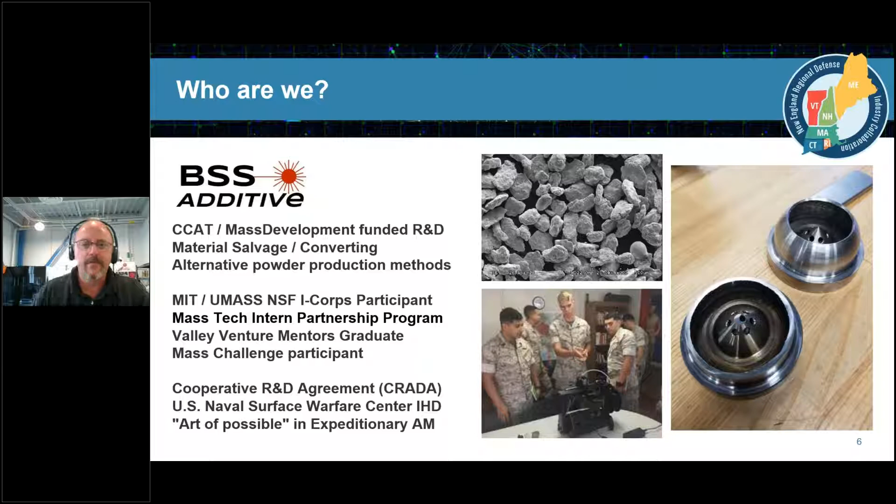Towards that, I've got a number of colleagues. The first, who I'll introduce, is Jean Mozolic from the Mozolic Group. Jean, go ahead.

Good afternoon, thank you Steve. My name is Jean Mozolic, and I do have my own consulting company, the Mozolic Group. A little about my background: I have a bachelor's and a master's in material science from MIT. I've spent the last 45 years in the thermal spray industry with a real interest and expertise in materials, predominantly metal and ceramic powders, giving me broad industry-based experience utilizing these technologies.

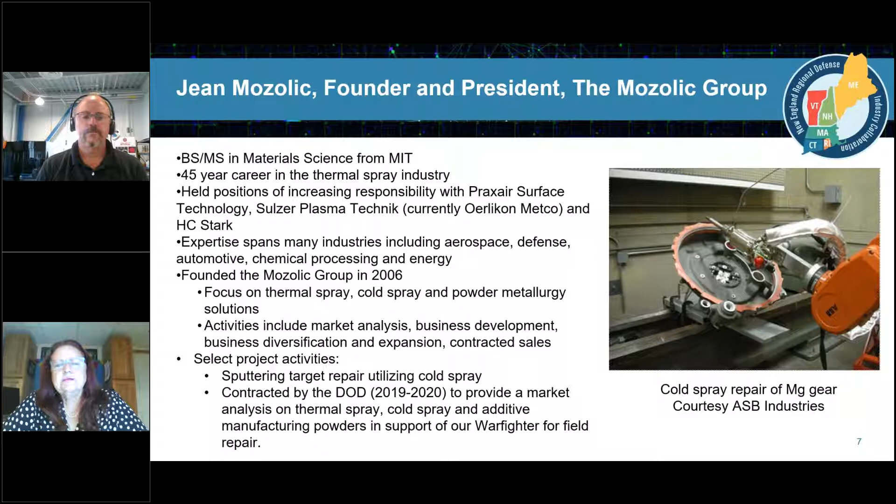Now, I'm part of Steve's team, supporting that through my background and interest in powder metallurgy. Also very much interested in the recycling and reuse of materials, which is becoming extremely important to the DoD because there's a real need to support the war fighter in the field. They don't necessarily have materials off the shelf, so there's all kinds of technologies out there to look at converting scrap metals and components into usable materials to feed the various processes.

My particular background in recycling goes back to my thermal spray days. One area was managing hexavalent chrome, a very well-known carcinogen from chrome oxide powder used in the printing industry. Also the reuse of tungsten and cobalt units from hard metal scrap, predominantly drills, bits, and seals.

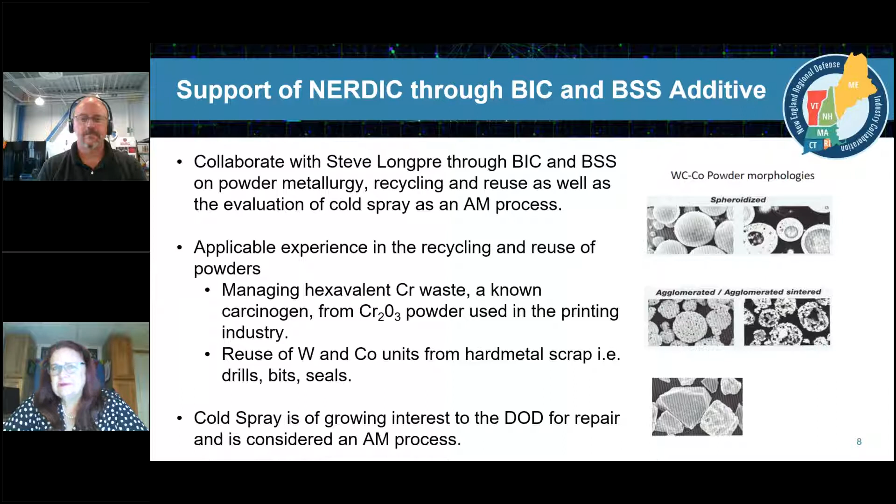I'm a 25-year veteran in the technology industry, starting out as a design engineer in pro audio, then onto consumer products and enterprise products. It was about 17 years ago now, I think, that I bought my first 3D printer as a design engineer. We found it invaluable in getting engineering verification and industrial design verification of the products.

We were in the early stages of development and very quickly moved on to upgrading those from a product marketing standpoint, because we found sales samples and getting into business and market development by getting works-like samples out into the hands of potential customers while we were still early in the design phase was incredibly valuable.

As I eventually became responsible for watching P&L statements, I became very interested in what additive manufacturing might do for us in terms of inventory control in the future, and how manufacturing final products with additive manufacturing could revolutionize the market. That's kind of where I've been pushing in my interest in this field for the past several years, and that was kind of the context of how Steve and I met 2 or so years ago now in the context of BSS Additive.

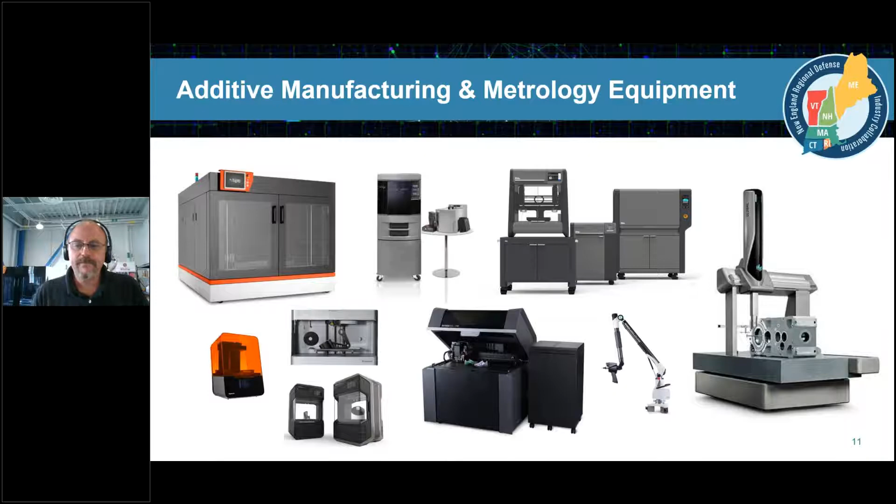We were recently, because of the work we started in this space - the virtual reality, mixed reality, simulation, and 3D scanning space - awarded a significant grant from General Dynamics Mission Systems, an award of 15 HoloLens One headsets that we are now helping our members access. We hope to be able to offer these to NERDIC partners for development purposes, things like training on advanced manufacturing, but also legacy systems, ways that we can start to hand that information on how to utilize these manufacturing tools to benefit the defense supply chain and ultimately the warfighter.

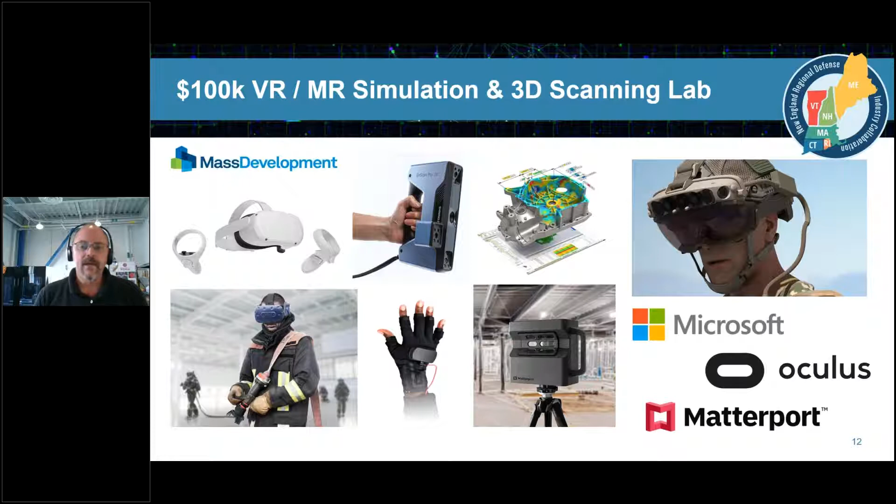On this particular project, the benchmarking project, we also extended an invitation to the University of Massachusetts ADDFab facility, which is just over about an hour away in Amherst, Massachusetts. In addition, we've been working closely with our NERDIC partners, CCAT and UMaine, to produce the samples that we'll be discussing shortly.

So I get asked a few times, why benchmarking? What's important about benchmarking? This is a 3D printing discussion, why would you need to have a benchmark? Well, benchmarking is for anybody that's in manufacturing - it's an essential process to understand the performance of a particular system, whether it's an economic system or a production system, machining, injection molding, roll-to-roll process. You can't get very far unless you've actually developed a methodology, and that methodology stands up to iterative examination.

And especially today, where we sit in front of computers, we sit in front of cell phones, we sit in front of machines that collect data that are capable of processing more data than any of us can possibly handle in a lifetime, it seems. Being able to gauge those systems, understand how those systems work, and how the data collected from them can be used to improve their performance is a key component of Industry 4.0.

And so we decided that taking a look at benchmarking the equipment that we just purchased is a core feature, because the last time somebody benchmarked additive manufacturing through one of the national organizations was back in 2014, at least in the particular area that we're looking at. So we decided that this was a good first effort.

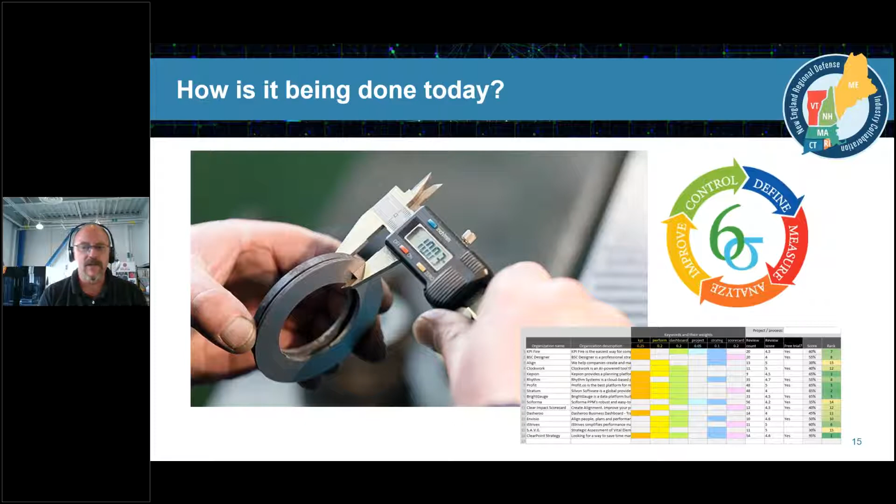We've also seen the advancement of a whole range of technologies, from large CMM systems to handheld portable systems like handheld scanners, Romer arms, and some of the technologies they have down at CCAT, like the ATOS ScanBox. These are automated metrology systems, ways for measuring and collecting data, and they're becoming more and more a key component of the commercial manufacturing ecosphere.

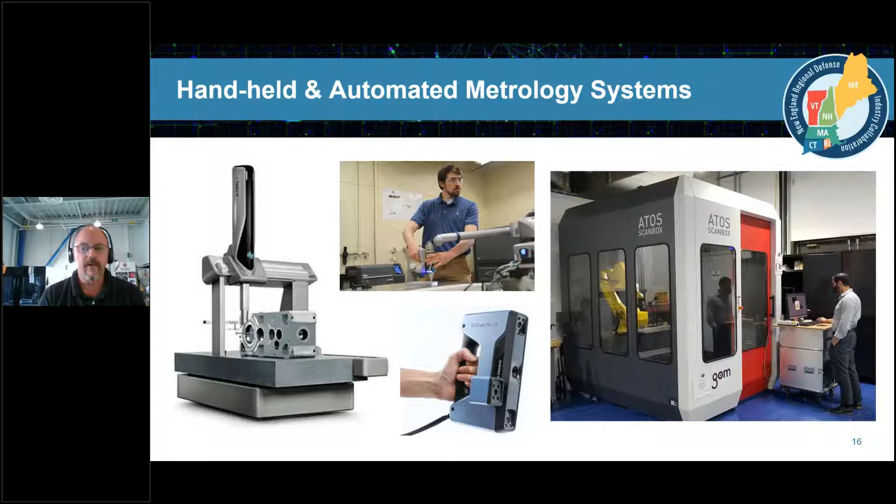But we're seeing a new trend occur in advanced manufacturing, and that's on-machine measurement and inspection. Because of the Internet of Things, because of our ability to create cheap sensors or complex sensors, things that can do things because of laser light scanning, measurement, non-contact measurement and temperature probing, we can start to collect massive amounts of data from the things that we're manufacturing, and we have to find new ways to display that.

So we've seen the rise of companies like MachineMetrics here in Massachusetts, who are developing digital dashboards, ways for manufacturers to install methods or systems for the people on the shop floor to actually start to gauge how their equipment's behaving, how their production cycles are scaling, and nimbly react to that data.

This is becoming a center point of what 4.0 technologies offer in the future - the ability for us to now start to mount and incorporate Internet of Things types of devices, edge detection devices within our equipment, and not only in manufacturing, but in things like facilities operations, delivery, and so forth. So that's a key component in benchmarking.

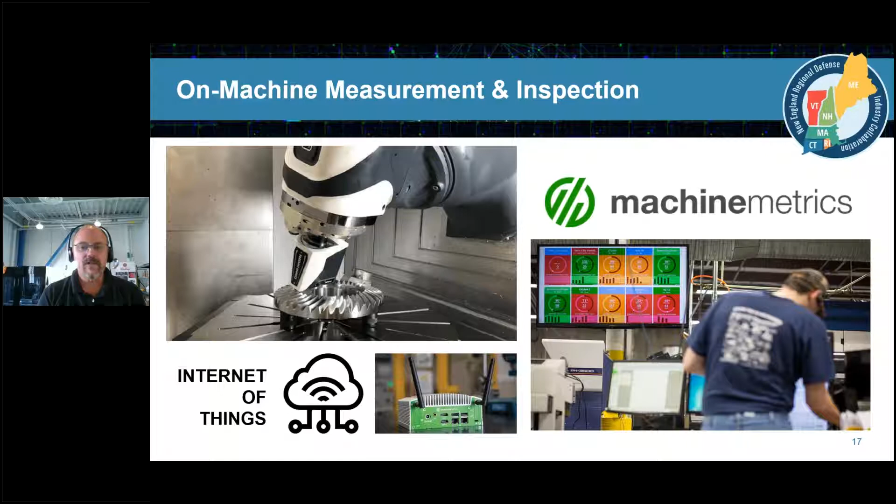So what we did is, to start our quest to understand how to benchmark the desktop metal system, we looked at what was done in the past through the National Institute of Standards and Technology and ASTM under F42. We looked at the technical standard they used for measuring the performance of laser powder bed fusion systems, built upon information from machine metrology and benchmarking subtractive machining, using simple repeatable patterns like circles, squares, diamond shapes, stepping, graded steps, pinholes or pins. Understanding how these features could be manufactured using these systems was a key question back in 2014.

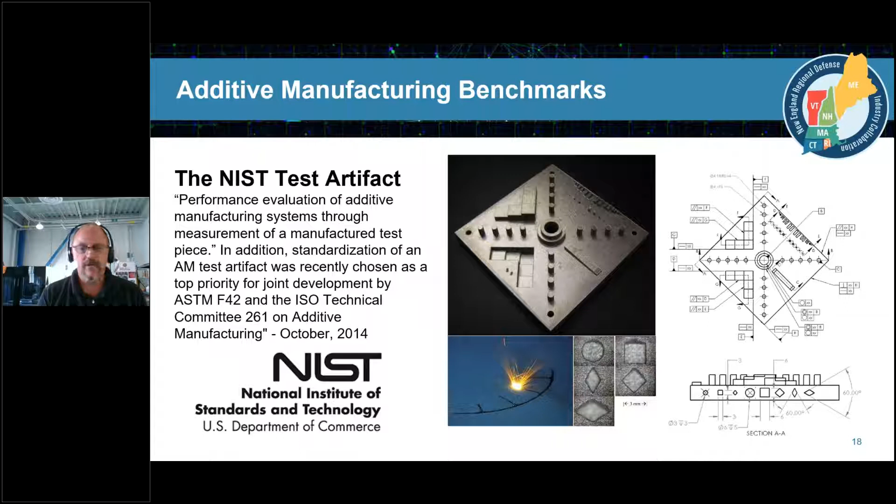We wanted to ask the same questions around the desktop metal machine because it was recently iterated. It's only been around for about 2 to 3 years now, so this was the starting point for our examination.

We also wanted to understand how we would share that information. While NIST data is being constantly collected and integrated into databases like the Senvol database, we'd like to understand what the challenges are for benchmarking these new FDM or bound metal type processes, metal injection mold, powder binder jet fusion type processes. Will those also be incorporated within Senvol databases? So we had to understand how the data set might actually be of value and what its size might be.

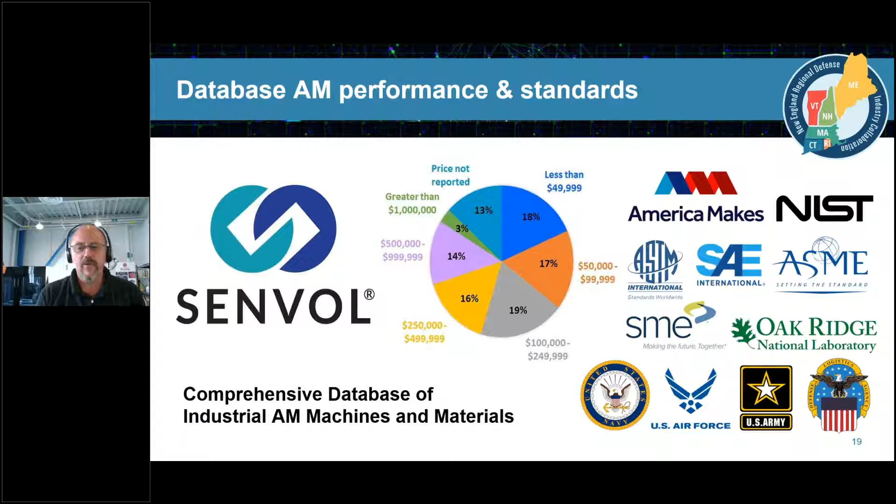So we started again back in the learning area. How are hobbyists learning to benchmark? It's interesting - most people that have played around in the 3D printing space have printed at one time or another something like this, called a benchy.

There are other types of benchmarks, torture tests as they're called, that can demonstrate things like dimensional accuracy, the ability to bridge or create overhangs, fine feature controls. These are all things people are doing constantly with their 3D printers, and in the process learning how to actually operate them. If you look at the scientific community, they're actually starting to print very, very tiny benchmarks, like this 20 micron size benchy that was printed, I believe, at one of the national labs.

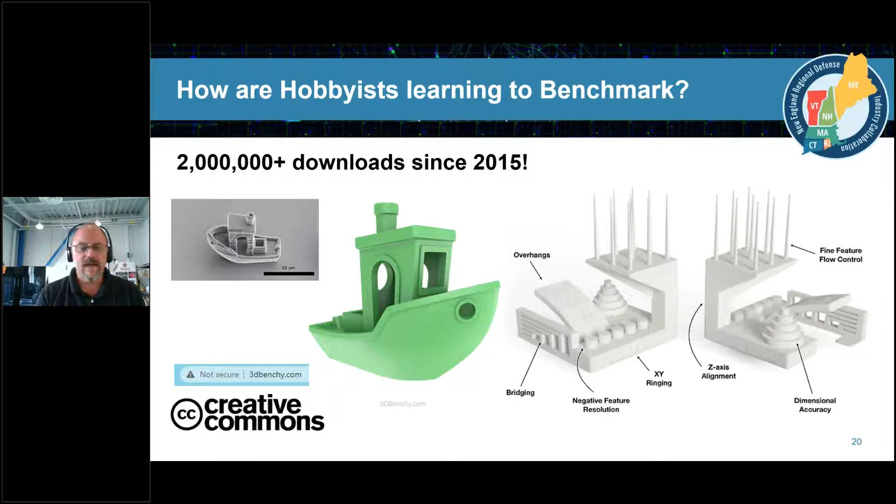The interesting thing about this is these benchmarks are seeing enormous distribution, over 2 million downloads since 2015. That's significant because the people that own hobby level 3D printing systems are becoming kind of a standards group - they're becoming a manufacturing capability unto themselves. The challenges with that, however, come into things like Creative Commons, and the benchy site itself is not secure. I found that kind of humorous, because when we're looking at national defense machining standards, those things have to be addressed, and unsecured benchmark or information sites, Creative Commons - that's not within the realm of defense machining.

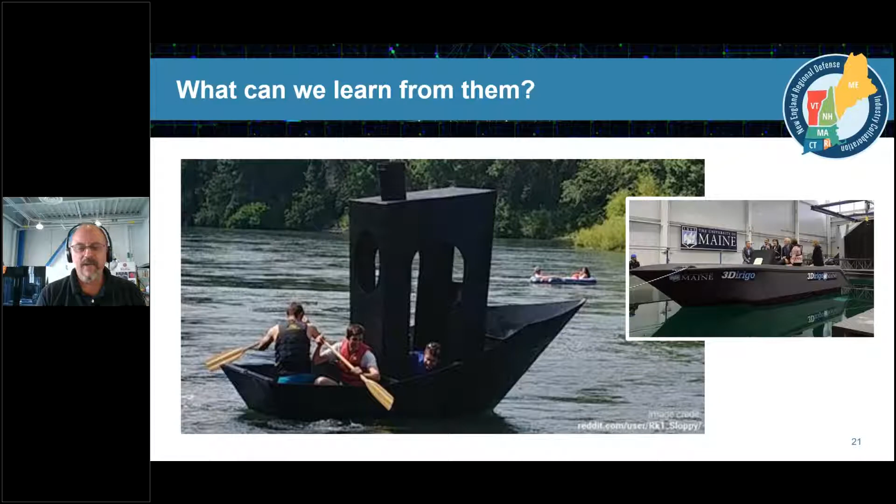So again, what can we learn from the hobbyists? Obviously we can print very large structures. We might even be able to get them to float. And in some instances, like University of Maine has demonstrated, they can be done at very, very high quality. So these are two extremes, obviously. We want to fall somewhere a little bit towards the right side of that equation. Understand that defense machining is not just something you're going to float down the river in, but hopefully we can help manufacturers iterate towards the right side of that equation.

So again, back to the desktop metal system - we wanted to understand what its capabilities were, what its material and operating requirements were, the software, what kind of case studies there were, and how these benchmarks might apply. We're also, because we're developing reground materials, looking at expeditionary applications. Could this system be deployed in remote locations, whether in a field deployed location where we might be repairing military equipment, or potentially higher range applications, things like NASA, where we're looking at eventually being able to establish permanent presences on the moon and Mars. What is the definition of an office, as Desktop Metal suggests, and how can we gauge what those capabilities are? That was important in our examination.

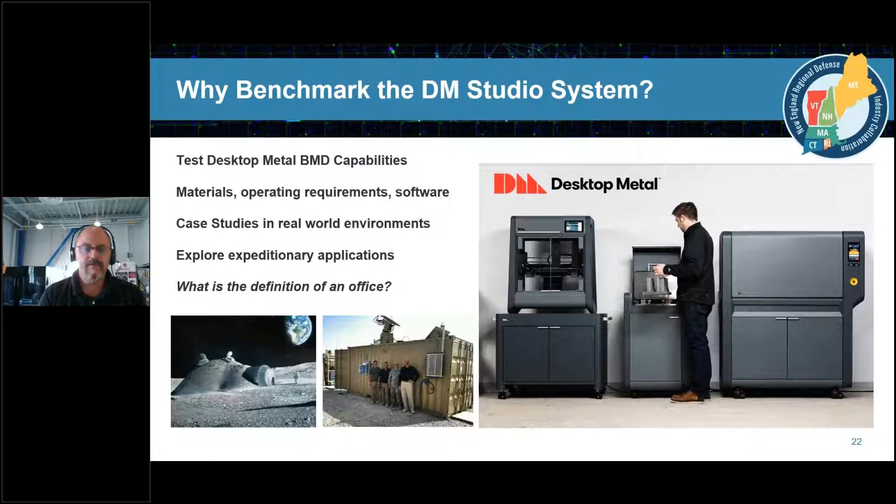So we purchased a used machine, which is something that's common for most manufacturers. There's a lot of equipment out there that's constantly being resold. During this study, a company with very high potential called Digital Alloys, out of Burlington, Mass, ended up shuttering its doors after about 4 years, and their equipment went up for sale on a well-known auction site. So purchasing used equipment is nothing new to manufacturers, especially in defense supply. That's what we started off with.

We purchased a used Desktop Metal machine under a Massachusetts Skills Capital Grant to start teaching and learning about its capabilities. We wanted to understand, first off, how to prepare a facility. What were the requirements?

You can see behind me, we've got a very large facility here. Where would a system like this fit in? That's a kind of benchmark. What would the ventilation, electrical, floor requirements, process gas and feedstock handling requirements be? These are all things small and mid-sized manufacturers need to ask, especially when adopting a new technology. Comparatively, how can it integrate into their current operations? That's another form of benchmark.

Permits and certifications - we realized the desktop metal system doesn't really require any. By comparison, things like laser powder bed fusion systems require much more. So there was an immediate advantage in looking at bound metal deposition systems compared to powder bed fusion and binder jetting, in that we didn't have to handle some of the potentially reactive powdered metals I've had experience with in material development. We also didn't have to worry about enormous equipment being moved in with all the support technologies around it.

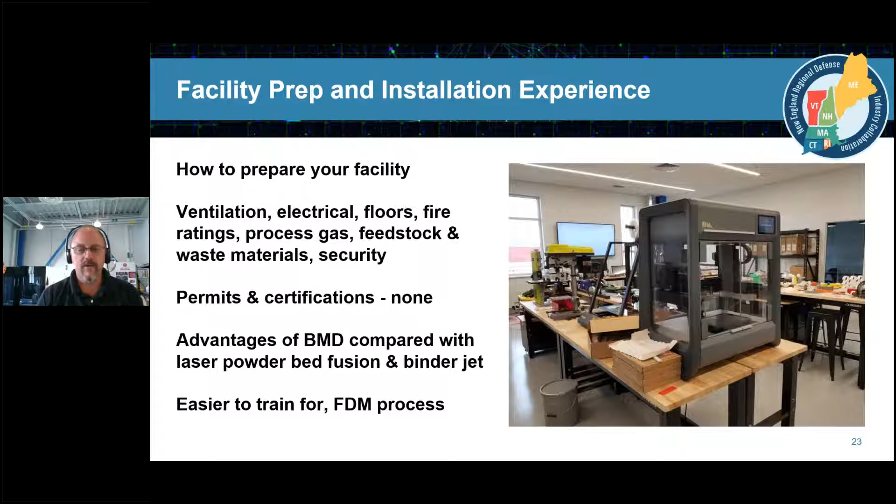So that's another benchmark - how do we train around that? What are the current methodologies that seem to work best, and how can we intersect them to help our members and the local community access and test out metal 3D printing, with the intent of eventually scaling into that space?

What were some of the applications we were looking at? We're a member-driven organization, so some affiliated companies do things like injection molding and thermoforming or overmolding of wire harness cable connectors. We wanted to understand whether this technology could improve upon that process - for example, conformally cooled injection molds, or heat exchangers and chiller designs for mold cooling.

We've got a large group of companies over in New York in the LED lighting industry, an industry that's here to stay because of efficiency and its proven impacts on climate change. So we looked at applications like 3D printed coppers for improved thermal performance elements, as well as things like medical devices. We've got a company here interested in understanding potential tooling applications in personalized medicine.

We also looked at applications in lightweighting of vehicles, with things like bicycle derailleur hangers, potential car parts especially in older vehicles, and also agricultural supply, where all these types of technologies seem to overlap, whether it's fluid dynamics or thermal improvements.

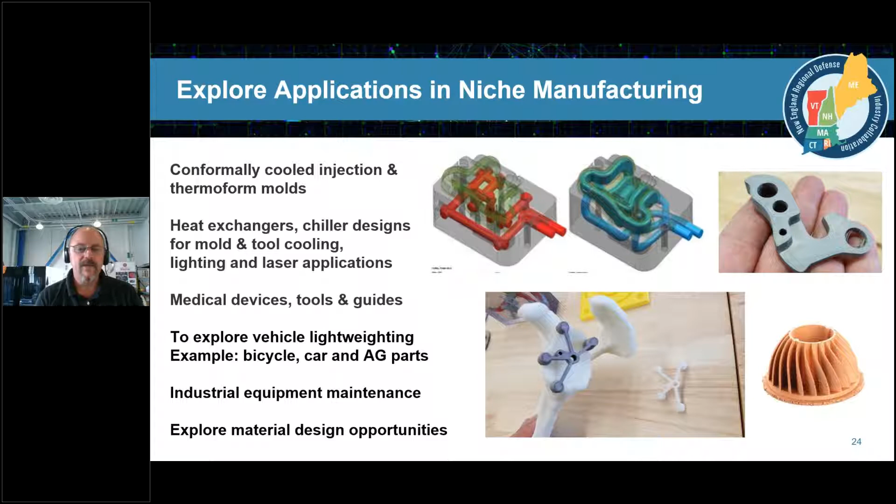So that brings us to the material development side of things. My startup is predominantly focused on materials development. Jean's background is heavily focused on materials development, use, and industrialization, and looking at where this type of material could fit into other businesses, an area that, as Mark touched upon with his background in using 3D printing and industrialization, is a crucial question.

So the BMD system utilizes a stick form of extruded metal, almost like a pencil lead, that gets placed within the system and then is extruded in sequence to make parts. That kind of technology is very well understood. If we make pencil leads or any kind of compressed extruded metal, very low cost equipment can manufacture that.

We wanted to understand whether there was an intersect opportunity for some of the work we're doing in reground metals to potentially use the desktop metal system as a material development platform. What would be the challenges in something like this? What opportunities could bound metal deposition pose for things like quality control? Could it also be used as a stepping stone into things like single pass binder jetting, desktop metal's larger systems, or even binder jetting in general with companies like ExOne? Could we use and measure the performance of these materials as a development platform using the system?

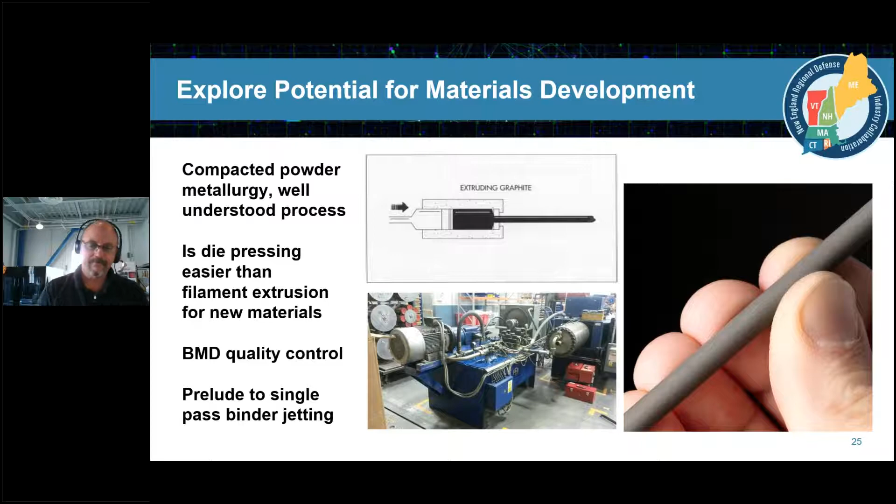This builds upon work we've been doing here before. BSS3D and CCAT back in 2017 discovered that we could indeed recycle stainless steel scraps from turning operations—very simple scrap metals from things like 3-axis CNCs, Swiss milling centers, all sorts of different applications—directly into usable powders.

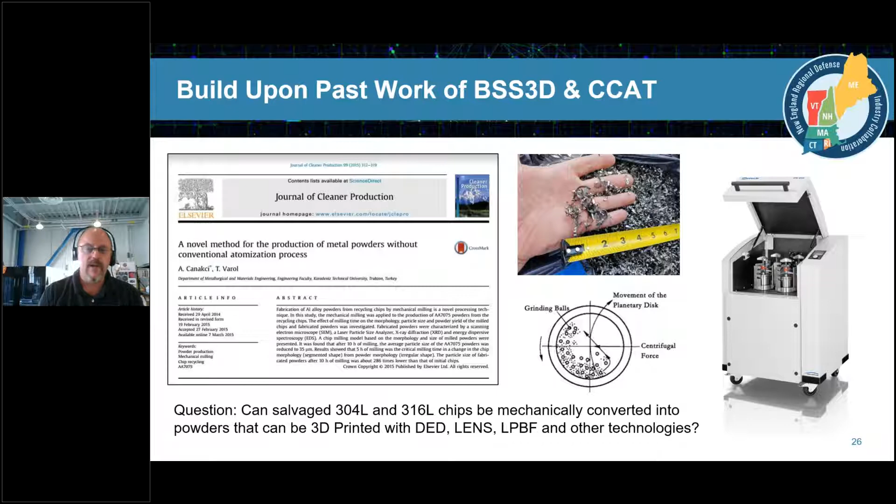This was built upon research we discovered being done overseas in Turkey, where researchers did not have access to gas atomization or plasma atomization to make the highly spherical powders that Jean showed us in her slide. We were looking at ways to convert this stuff directly into powder using mechanical grinding systems.

That indeed ended up with some success. We used directed energy deposition and LENS, two processes that CCAT has, to not only print some samples but also print millable parts using reference designs they've been exploring. That was quite impressive, and certainly worthwhile from the standpoint of short funding science—ways to get things done quickly, demonstrate what's possible, and then start looking at what you need to fill in the blanks.

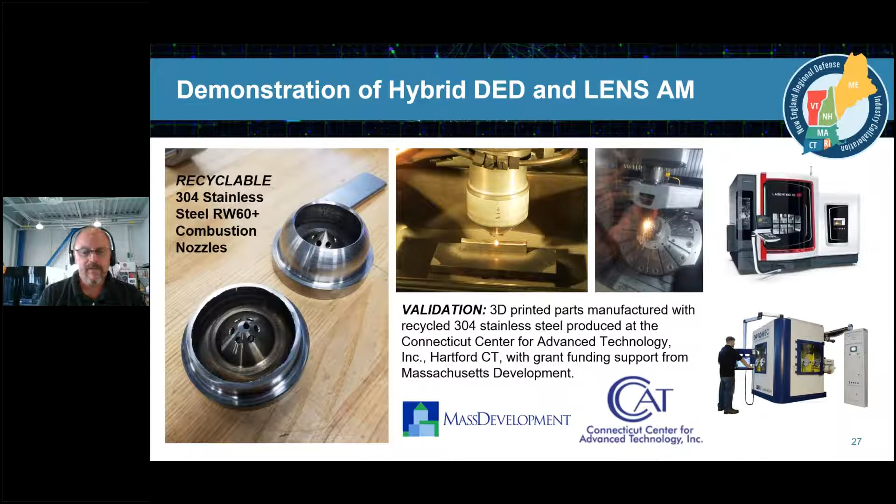So back to those images, our material is on the left. We were able to create a low cost, mechanically milled, rounded grain, spheroidal material with qualities that make it suitable for things like directed energy deposition, potentially FDM or bound metal powder, binder jetting, and also potentially cold spray. By comparison, materials normally produced in the metal injection molding industry—water atomized powders, pressed metal sintering and molding, or gas atomized powders used predominantly in 3D printing—show quite a difference.

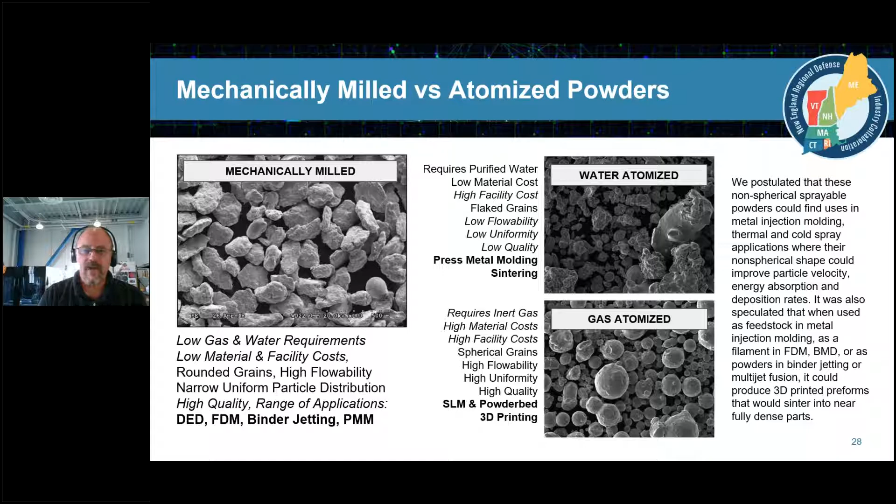But what we found is that our materials have a place in this landscape. The next step for us was: now we can make them, potentially a lot of it—how does it actually fit within the manufacturing sphere?

The next intermediary step was an introduction to the Army Research Lab, where they were doing high-end work producing something called nanogalvanic aluminum—a powder that can react with water or saline-type fluids to produce high hydrogen generation and generate electricity through things like permeable membrane fuel cells. We looked at their technology as an inline production capability for recycling scrap metals in the field.

This technology is fairly well understood. We understand the cost structure around it, and it opens doors not just to remanufacturing scrap metals, but also potentially becoming toll processors for other materials streaming out of our universities—which, in the instance of the Berkshire Innovation Center, the Connecticut Center for Advanced Technology, Vermont Technical College, UMaine, and other participants within the NERDIC framework, represents a lot of really interesting work being done in material science.

How do you get your first sample? Well, we demonstrated that we can do that very simply, but how do you get to production quantities? What are the benchmarks in cost assessment and the economics of those systems? These are things manufacturers need to know, and oftentimes researchers may not have the ability to calculate.

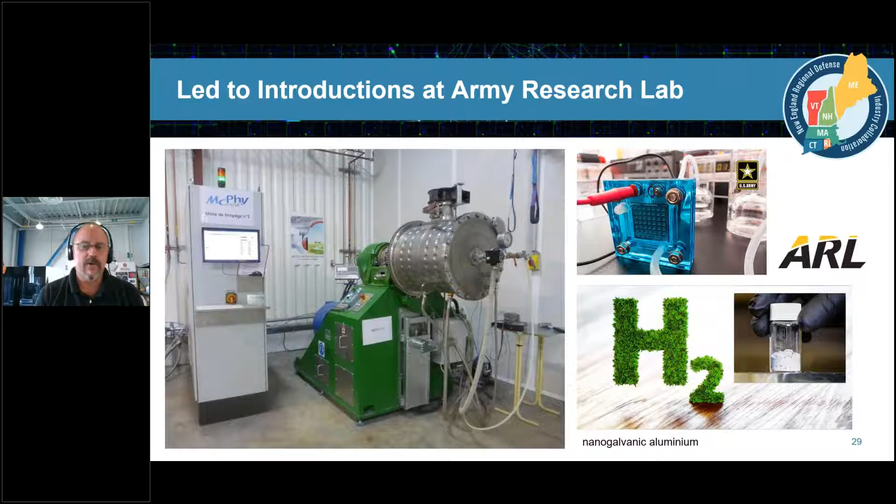So we were looking at that kind of background and research from participants at our national labs. We also looked at scaling supply. How do we go from that point to a scaled production capability?

And again, a recent background is that Desktop Metal has acquired ExOne, a binder jetting company. The integration of those technologies and the overlaps are significant, because in the situation of the BIC, we have some Desktop Metal technology. Connecticut Center for Advanced Technology has some ExOne technology, and we hope at some point in the future to be able to start benchmarking that also.

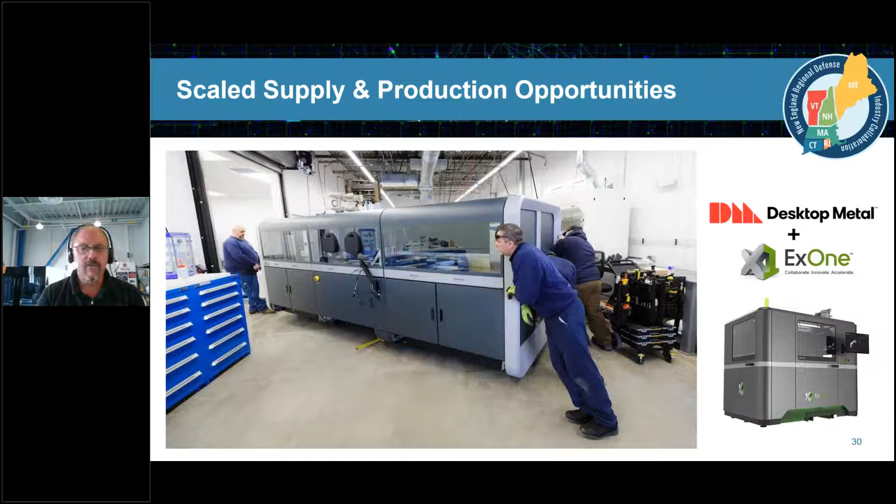And then again, back to some more whys. Lots of reasons why to be doing the things that we're doing. Cold spray expeditionary repair applications. If we're talking about defense supply, there's nothing more important than being able to support those people in the field whose lives are at stake. And so if we're looking at manufacturing something here in the States that's going to be supported overseas, we need to know how to repair it.

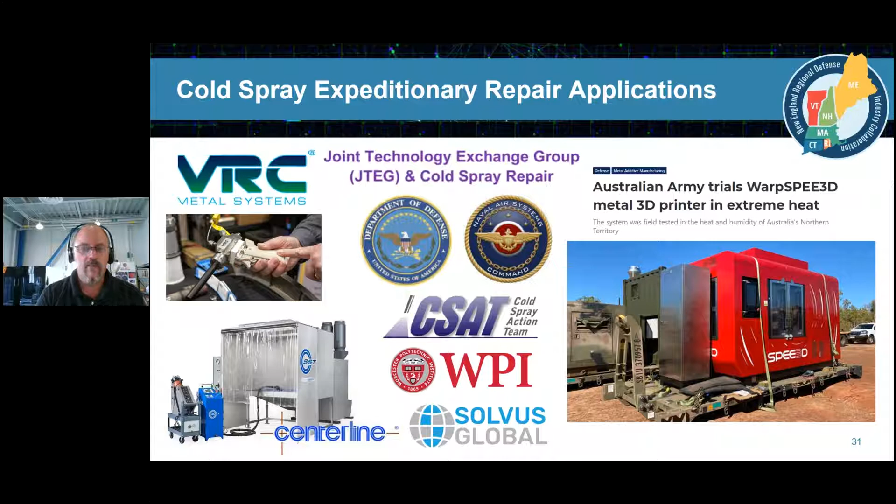Some of the work being done by groups in and around Worcester Polytechnic, Cold Spray Action Team, Solvus Global, and the companies that supply into them, things like Centerline and VRC, and now SPEE3D. These companies are manufacturing technologies that can be deployed in the field, and that can help sustain the products the warfighters actually use. This becomes a core question and a core benchmark that we're looking at examining in the future.

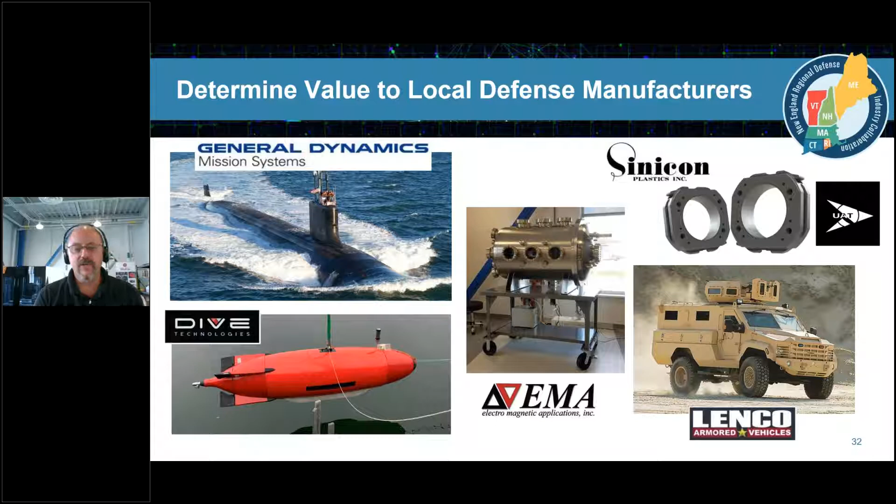And again, why? Because our manufacturers need to understand why. The BIC is host to a number of manufacturers, including General Dynamics, Sinicon Plastics, Lenco Armored Vehicles, a wide variety of manufacturers that need to understand what these technologies can do to make sure their systems have the longest possible life in the field.

And to also explore those applications and what could potentially become threats, things that we might not recognize. I was recently at a CAM event in Lowell, at UMass Lowell, and I asked one of the presenters, who's from the U.S. Army, what they need in terms of additive manufacturing. The first thing they said was, we need ways to manufacture munitions in the field. That is a core need.

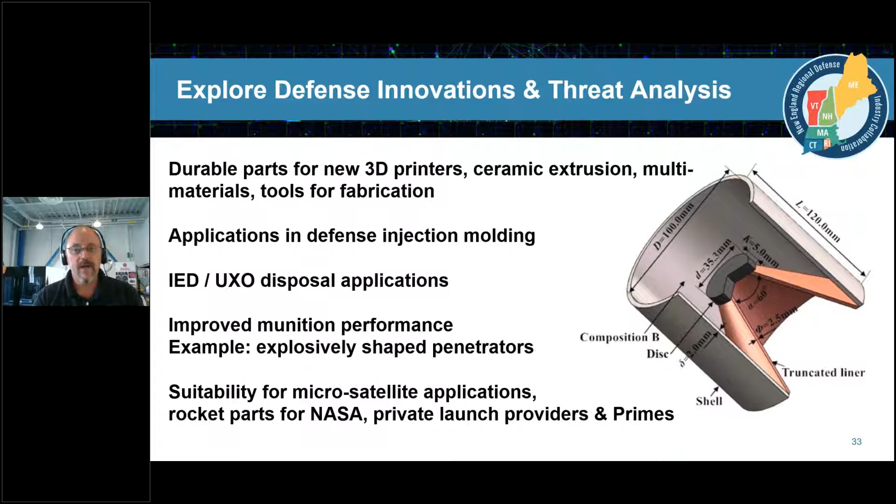And they need also to be able to do that so that they don't have to leave them there. Thinking about what's going on in Afghanistan currently, we've left a lot of ordnance in the field. It would be a lot better if we could just manufacture the things as we need them, which again is another feature of additive manufacturing.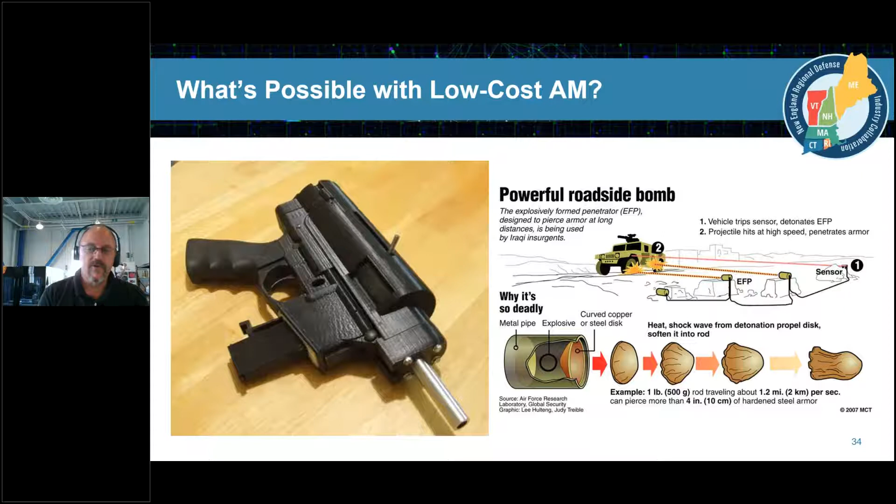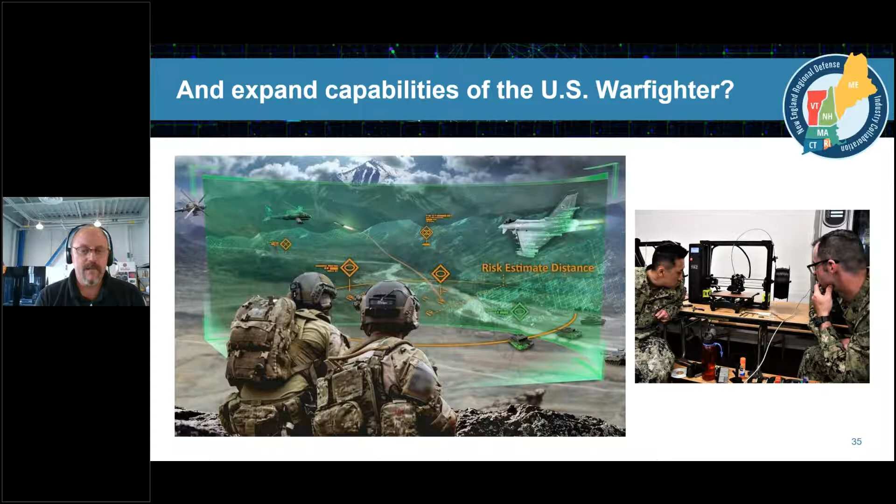And again, what's possible, to understand what's potential, what could be a threat. Benchmarks help us assess that. And ultimately, it can also help us develop new systems that expand the capabilities of our warfighter and help us make sure that they come home safe. So benchmarks are a starting line.

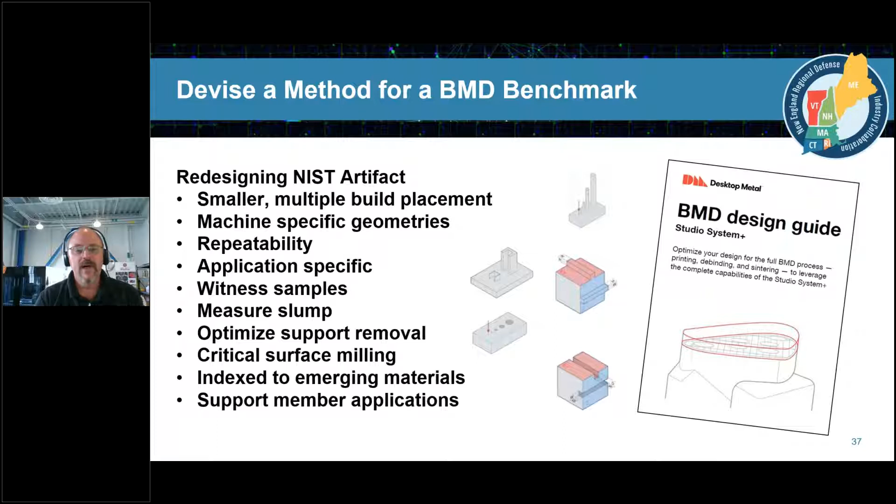And the starting line for us was the NIST benchmark. We used bound metal design guides from Desktop Metal to understand what was possible with the machine and what would be of value in terms of data.

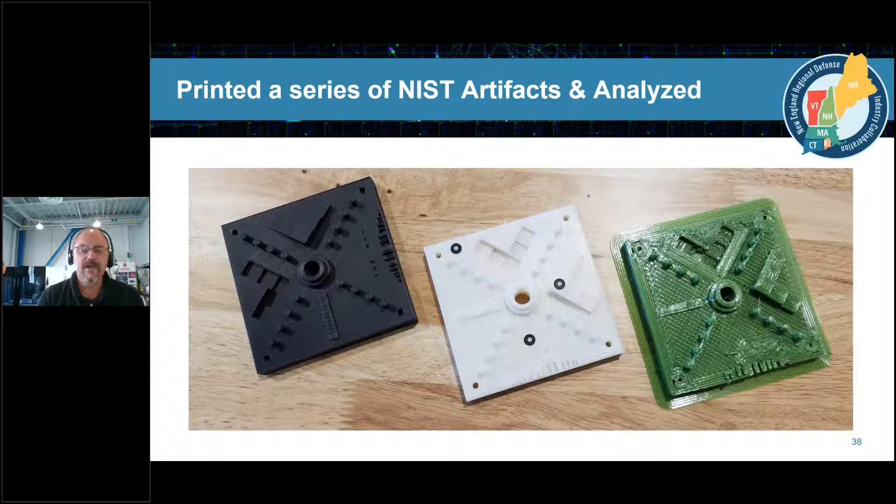We then used some help from a partner down in Rhode Island, Hexagon Metrology. They are the manufacturers of large scale and small scale automated and legacy coordinate measuring machines, CMMs. They also use structured light scanners to help reverse engineer and inspect parts. We got some initial data to understand what was possible from these first NIST benchmarks.

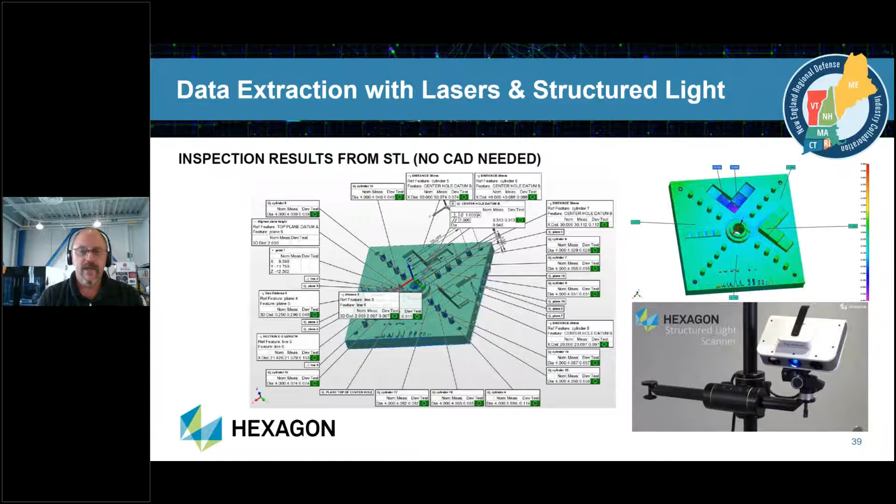We then realized that in the process of trying to 3D print something, there were some size limits with the Desktop Metal machine. The Desktop Metal system uses a furnace system that has setter plates. This ceramic plate behind the NIST artifact here is something that needs to have the print entirely placed within the center of it.

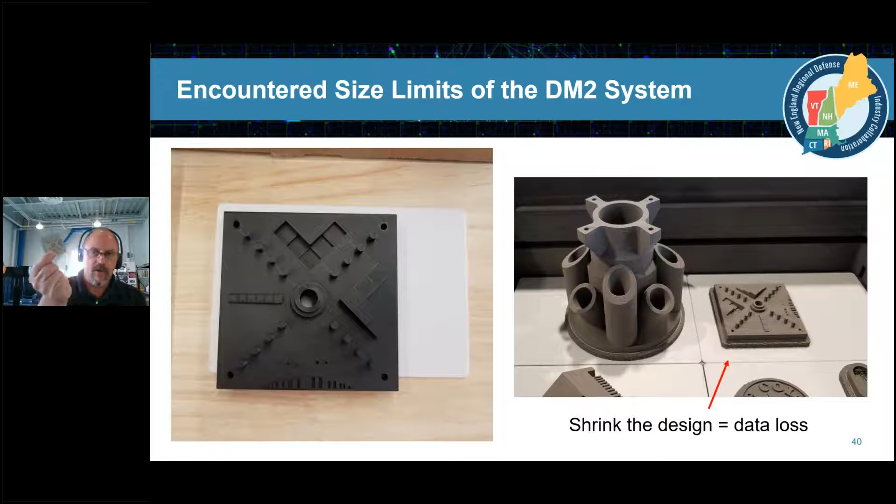It can't have any overlaps on the edges, otherwise the print will fail. So we didn't want to have that happen, so our first attempt was to print a smaller NIST artifact to understand resolution, how well the print actually functioned, whether it was capable of generating any useful data. And what we realized in the process is that a smaller sample just generates a smaller sample of data. It may not actually be useful.

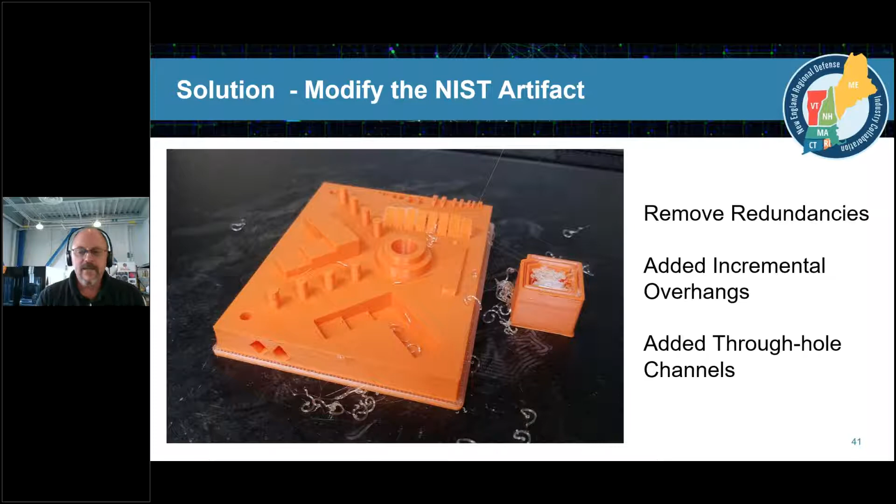And then we printed many of them. We went out and we not only printed on a MakerBot, we printed on a Stratasys machine, we printed on a Desktop Metal machine, and also a Markforged machine. And then we analyzed those parts. What was the end result?

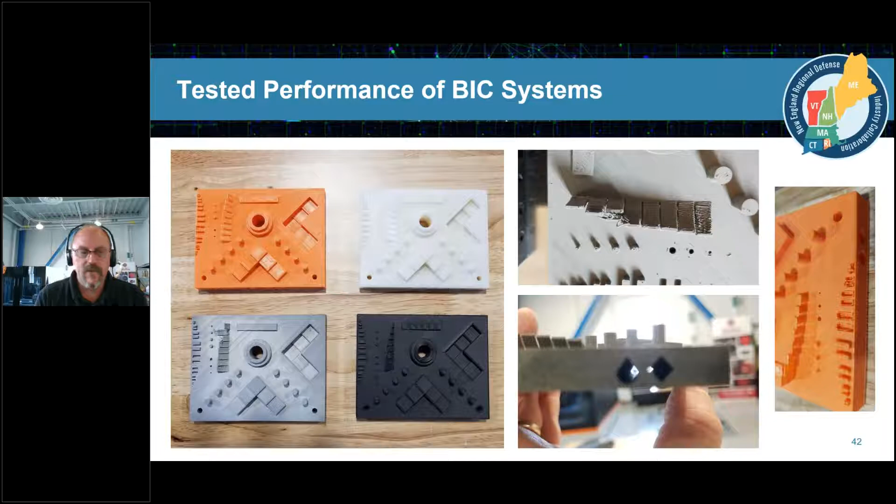Next. And what we saw immediately were some limitations, some challenges with our desktop system. The extruded metal sometimes printed well, sometimes it didn't. In these overhang features, we had some collapsing. In our through channels, we had some areas where the sintered metal eventually wasn't able to be removed. And then we also had some challenges with inset features in things like circles and squares.

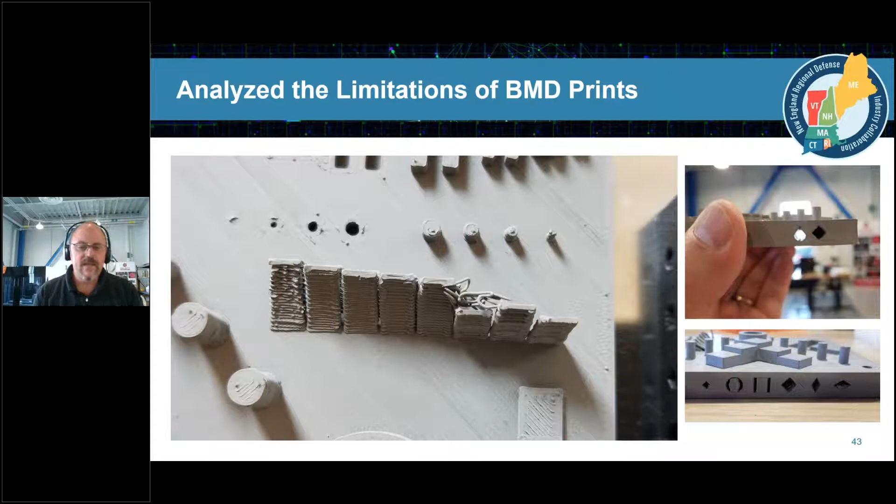But these were all things that were covered in the bound metal deposition guidelines that Desktop Metal provided. Next.

So then we went out next and compared not only the capabilities that we now have, but also the capabilities of online providers, companies that produce parts for manufacturers throughout the world, companies like Shapeways, Materialise, Xometry, and Protolabs. We wanted to understand what their capabilities were, and we also wanted to understand price benchmarks. It's very easy to do some of this. Anybody can create these accounts, but we weren't really sure where the capabilities that we have, as well as our partners had, fit within that equation.

Now we will be producing some more of this data in the report that we will be submitting in September, and would invite participants to connect back with CCAT and the NERDIC community to understand some of this benchmark. It certainly has proved to be useful for us.

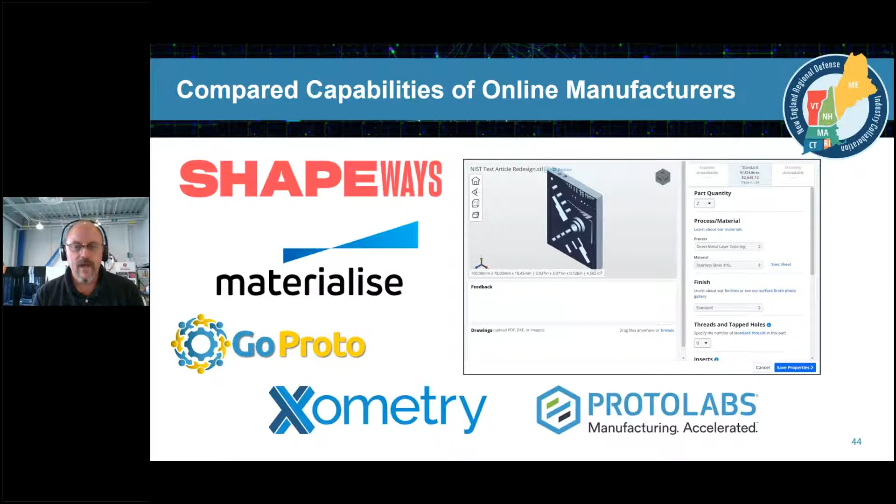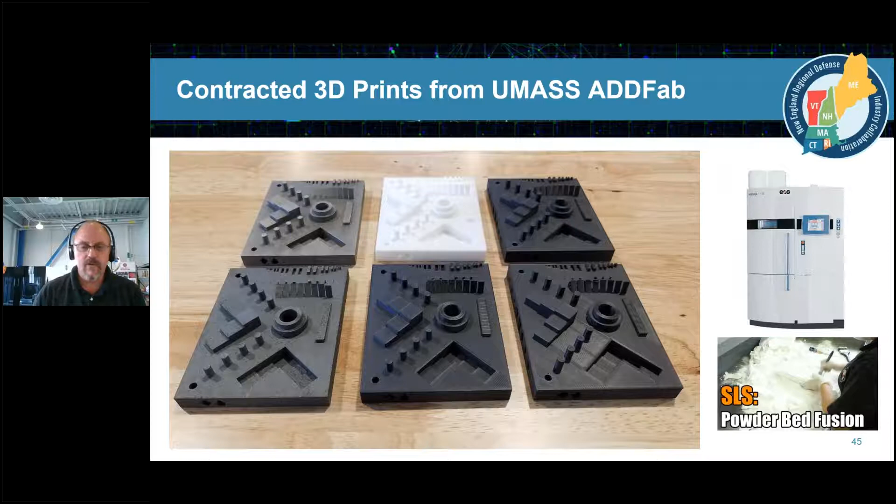Next. We then went to the University of Massachusetts, likewise contracted a series of parts, predominantly from their EOS M290 system, DMLS system that they have, as well as a EOS P110 system, which sinters polyamide materials. And then we also used three of their Markforged systems to produce coupons. Next.

We also explored heat treatment options. One of the key components in metal additive manufacturing is stress relief. We understand we can 3D print something, but sometimes those parts, while fully dense, aren't something that you'd want to put into a machine or into an end use, because the grain structure of those metals may be brittle. There may be some warping or some torsion or some implied stresses from the process of manufacturing. Machining things does this too. Just carving up a piece of metal on a machine center can create heat stresses in areas where a block of metal does not behave the same way as its cast form or its refined form.

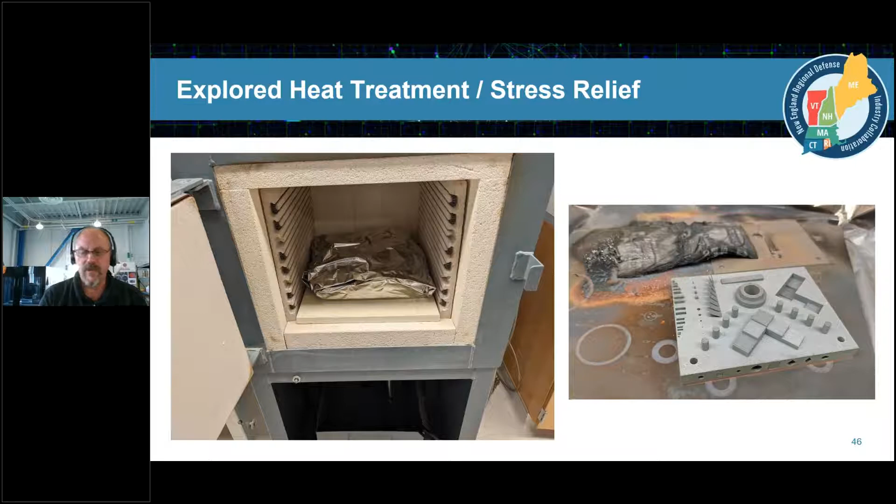So in 3D printing parts with the DMLS, the laser sintering systems at UMass and at CCAT, we requested a heat treatment system or process. Very simple: wrap it in tinfoil, throw in a small carbon source. In this situation, we used newspaper, and fired it at 1,000 degrees for about 15 minutes. Very simple process, many companies work with this, especially if they're in the tooling industry. So that's the process we followed. Next.

With regard to the desktop metal machine, we had University of Maine print on their Desktop Metal 1 system. We have a Metal 2 system. The difference between the Desktop Metal 1 and 2 system is that it requires a debinding phase, where you take the part after it's printed, put it into a solvent debind system for a couple days, and then into a sintering furnace. With our system, you don't have to do that debind phase.

As a result, we both encountered some slump, areas where the part did not uphold overhangs. We also encountered print errors, situations where the 3D printer, because it's a fused filament deposition type system, didn't extrude the pink interlayer, which you can kind of see in between these parts. These are challenges with any mechanical system, 3D printers even more so, because these parts often take up to a day or more to print, and any error introduced into that process can be a failure point.

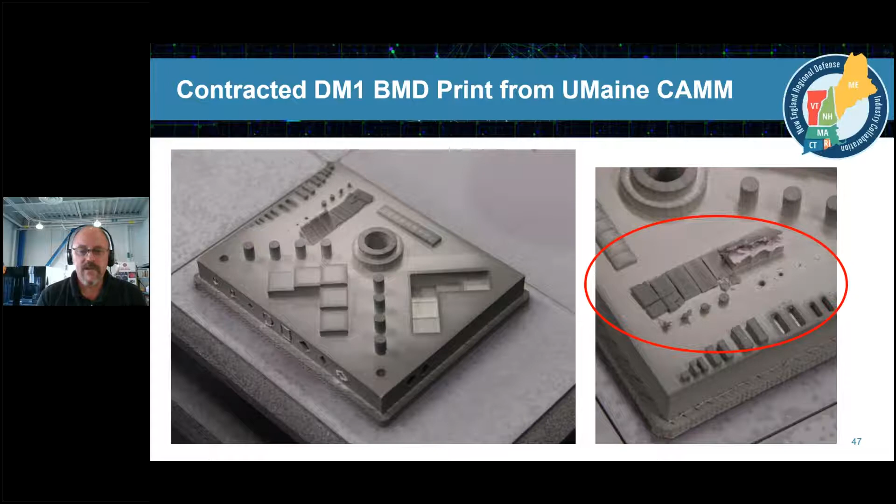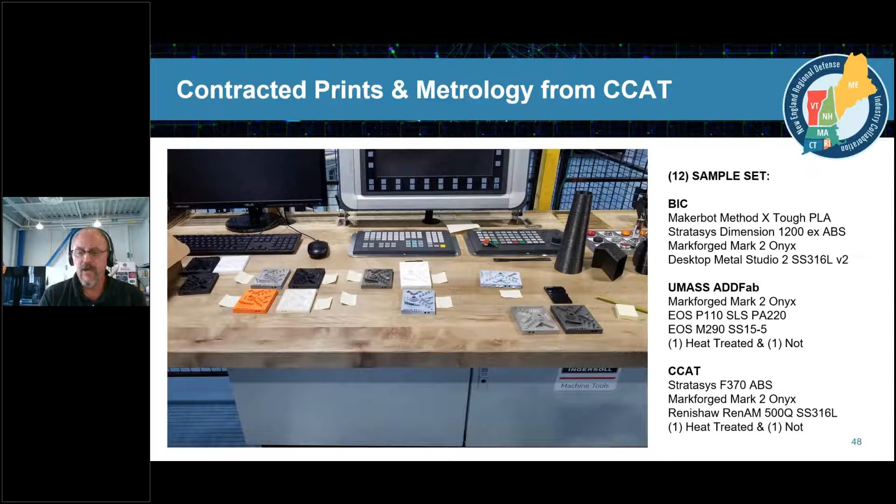We then went to Connecticut Center for Advanced Technology and had them duplicate the same work we'd requested elsewhere. So the total sample set we used is here—predominantly MakerBot Method or Markforged Onyx type prints, plus a select series of metal parts that are either desktop metal or DMLS type systems. We then used structured light scanning to scan those parts using CCAT's ATOS scanner.

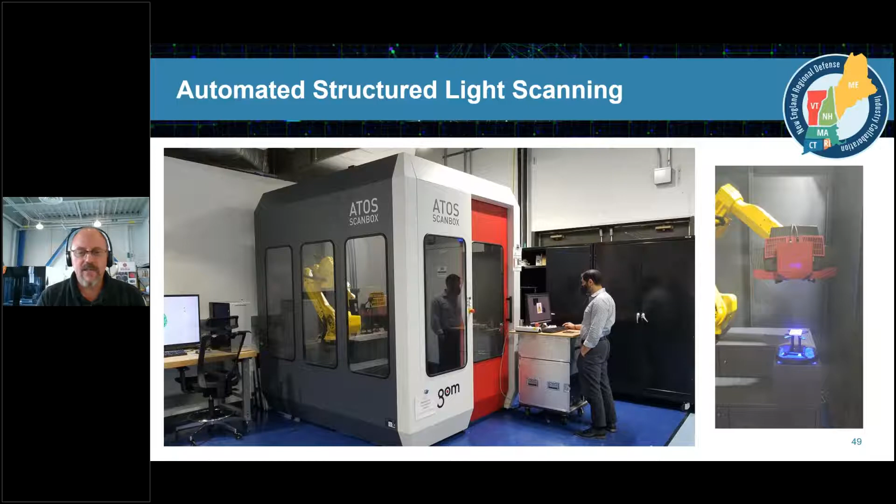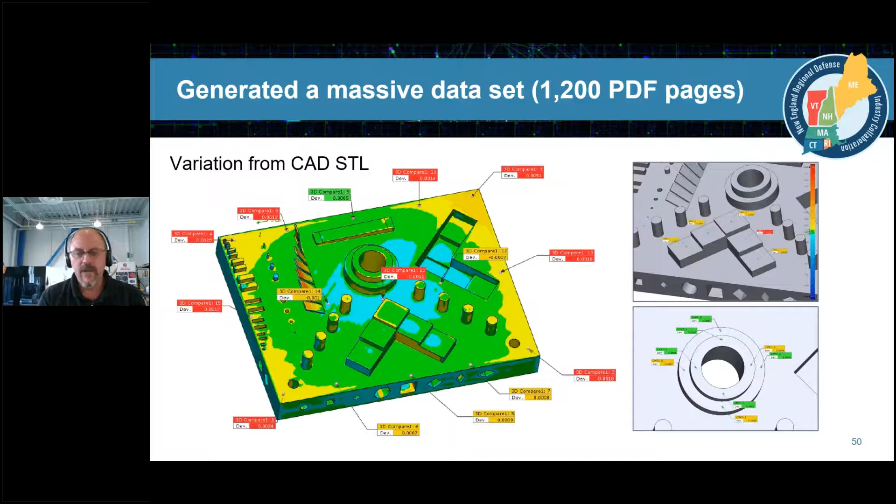Next. And we generated a truly phenomenal data set, close to 1,200 pages total. That data can get very coarse or granular—we can get into actual surface dimensions on all the features of the NIST sample. We'll be going further down this path to understand just what the value of that data can actually be.

But the heat maps are the most important. Looking at comparisons of BIC metrology from things like MakerBots through the Desktop Metal Studio system, you can see lots of variation, but you can also see these are certainly useful pieces of data, useful end results that, when combined with 3D machining, can potentially produce some really useful outcomes. Next.

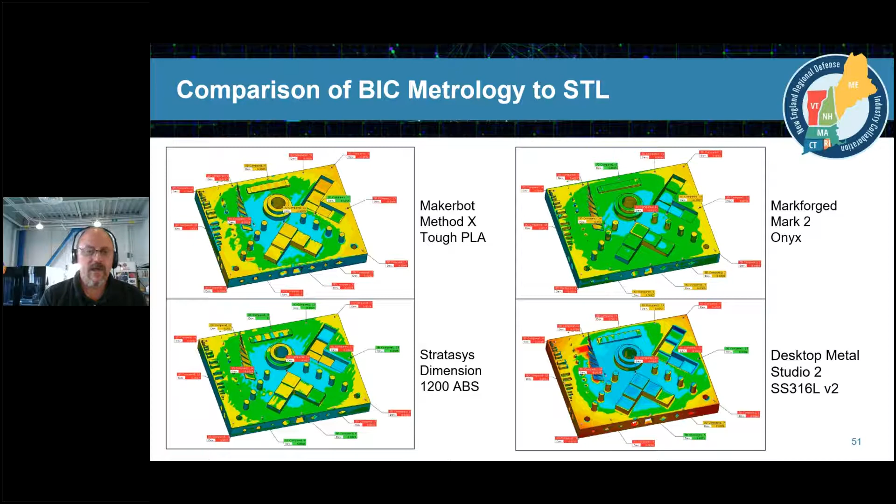Same thing with UMass AdFab, and with CCAT.

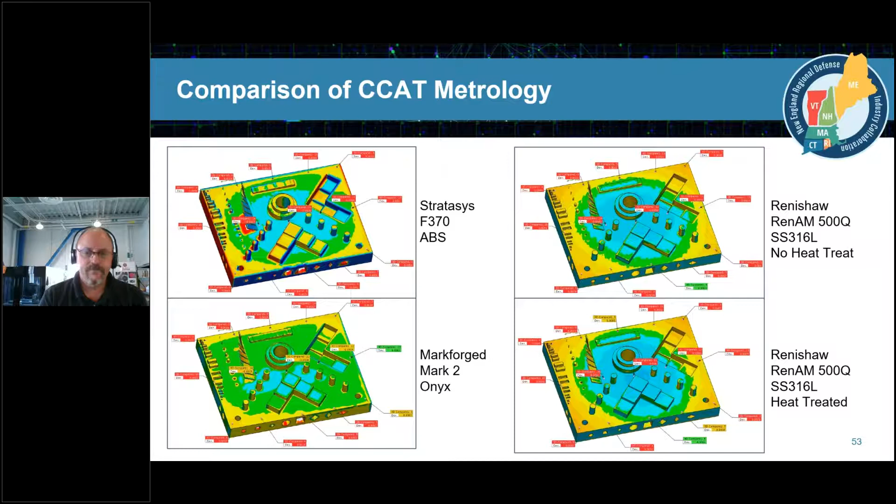So here is our lead-in hypothesis. It's very rough data, but we were looking to help manufacturers understand something: what's it going to cost to 3D print some parts, whether in a polymer, composite, or metal? And how accurate, how repeatable, what kind of performance of those materials could actually be implied from a study like this? And ultimately, are these parts going to be usable?

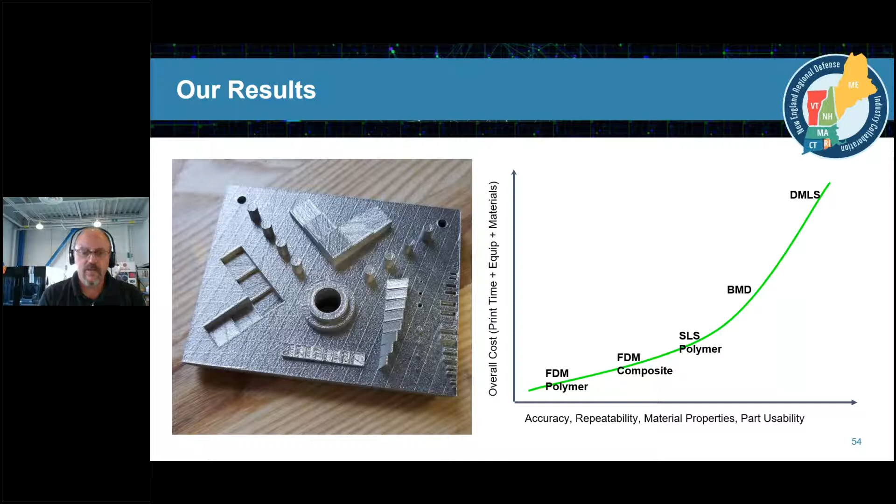Next. And where can it be applied? Everybody in the 3D printing industry understands there was a huge gain in utilized additive manufacturing of metal to produce and consolidate parts into a durable LEAP fuel nozzle.

When we look at advancing aerospace and defense systems, things like SpaceX's Super Heavy rocket, the complexity is enormous—it's off the scale. Can these types of technologies, these types of materials we're examining with our manufacturing partners through NERDIC, start to pave paths for companies to access the supply chain? Next.

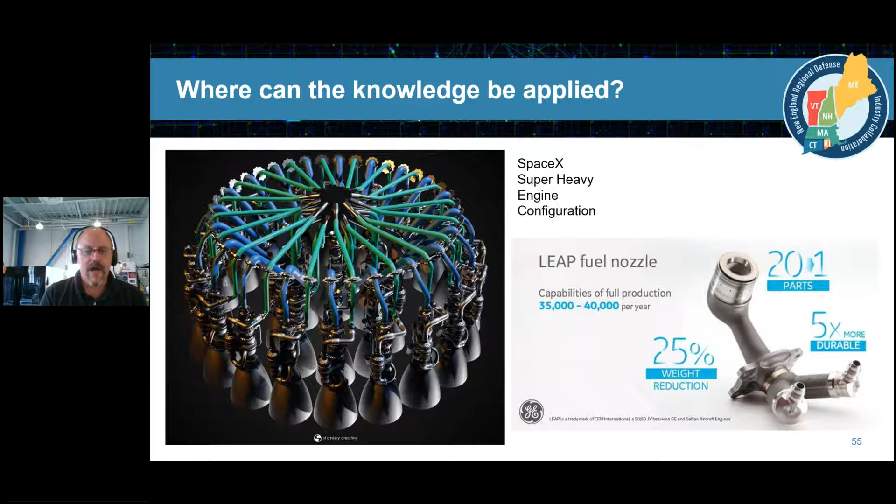And there's a reason. About a week and a half ago, Elon Musk released these two pictures in a tweet, pointing to the 1930s, where the heyday of our economic growth in many ways was heralded by manufacturing and construction of large-scale steel buildings. Well, if you look at August 2021, that's an enormous steel structure. And that's right, it's steel.

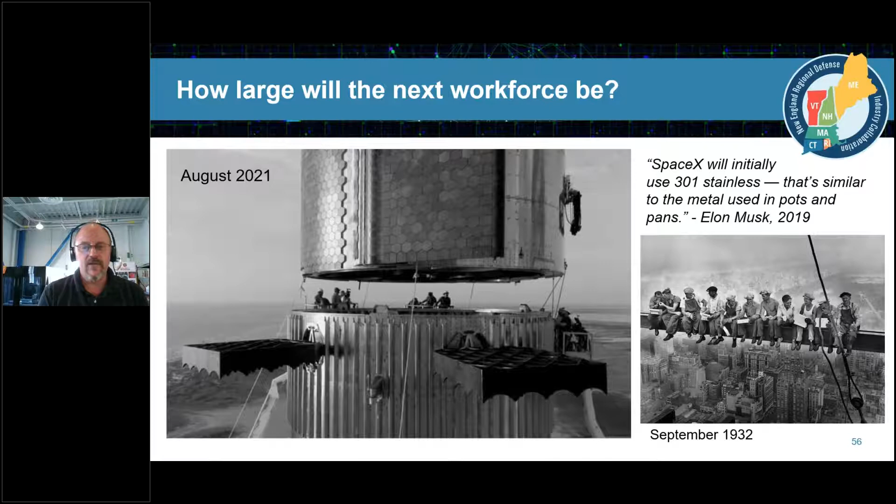Back in 2019, when asked what they were going to manufacture the Starship out of, they said, we're going to make it out of 301 steel. I think they may have moved on to 316 and some other alloys, but currently they're planning to manufacture 1,000 or more of these systems in the coming decades using steel. How large will that workforce be? Next.

Because it took over 400,000 people to land us on the moon six times, if we understand the scope and scale of potential Mars and lunar colonization efforts, the figure there could easily be 10 times that number, if not more. So it's important, if we're looking again at benchmarks, this is more of an economics benchmark, a planning benchmark for policymakers, for people trying to figure out how to plan. We could see enormous growth in 4.0 technology integration within manufacturing, just in support of the commercial space industry. That's something that certainly makes me think a lot.

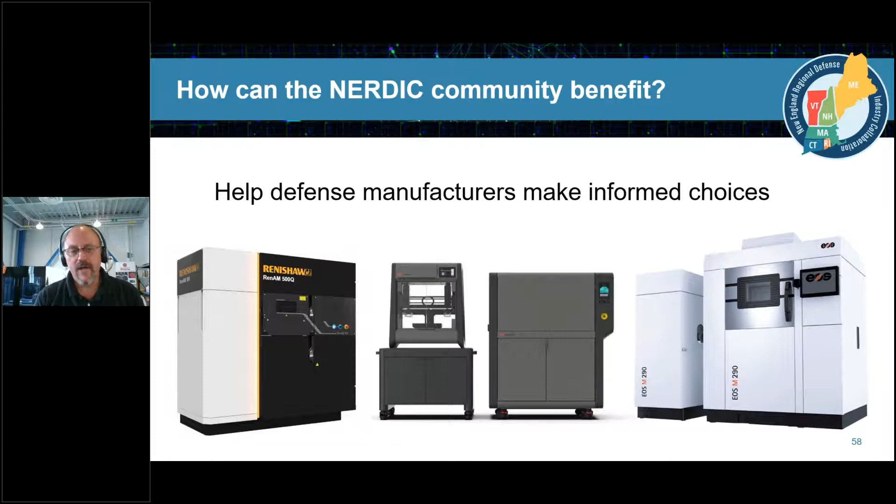And so how can the NERDIC community benefit from that? How can we help defense manufacturers make informed choices? That's, again, part of the benchmarking process.

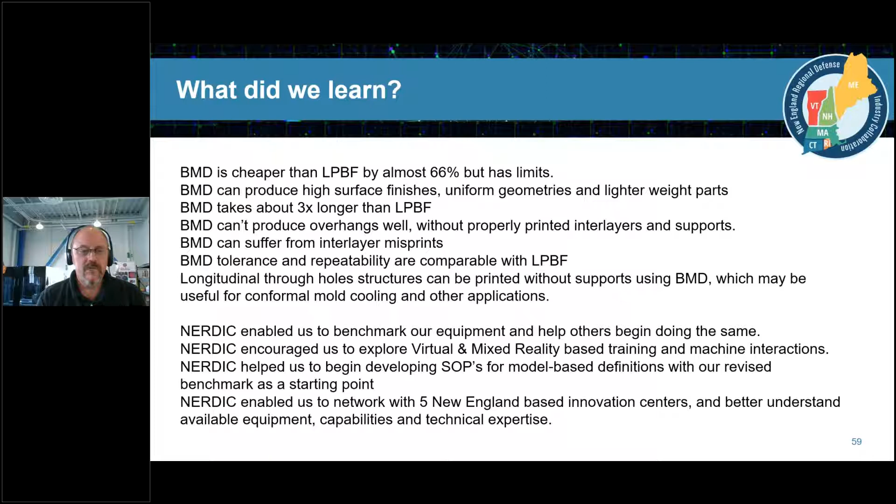So in short, we've learned quite a bit, and I'd like to start wrapping up this presentation. These are the things we learned in the process from just a simple benchmark. By no means is the work done. We'd encourage you to perhaps participate in the next phase.

By helping us pare down some of this data, understand what it can actually be used for in regional manufacturing. Maybe explore some applications with the group to understand whether what we've learned or begun learning can be used to calibrate and improve performance results for some of these newer systems. And how do we obtain more data? Certainly we can send you this file and encourage you to print it if you have a MakerBot, or a Markforged machine, or if you're fortunate enough to have some of the technologies we have. If not, and you'd like to get experience learning how to 3D print some of these parts in metal, please contact the various NERDIC centers and help us with the study, because we've only got 12 pieces of data currently. I can imagine what maybe another few dozen could actually help us understand.